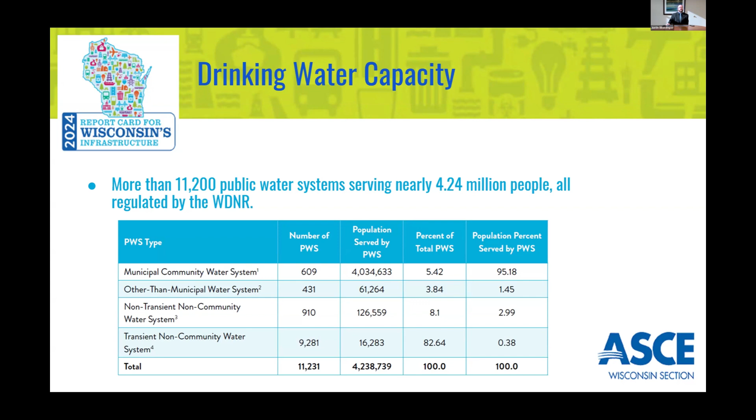56 of these systems are surface water systems, and they include some of the largest communities in the state, including Milwaukee and Green Bay. They supply almost one-third of the state's population, while groundwater systems consist of more than 99% of all the rest of the public water systems.

In general, drinking water capacity in Wisconsin is adequate, with plentiful access to groundwater aquifers and surface water supplies such as Lake Winnebago, Lake Michigan, and Lake Superior.

However, there was a study back in 2021 through the DNR showing that lake levels in the Central Sands region - i.e. groundwater levels - are being affected by collective withdrawals of high capacity wells, mainly used for agricultural irrigation purposes. So there is some concern that overpumping can lead to decreased groundwater levels.

A little bit more about capacity: there are 575 municipal water utilities that are regulated through the PSC, and they're all required to file annual reports. Based on these annual reports back in 2022, a little bit over 17% of the utility-produced water was reported as non-revenue water.

Of that 17%, it's estimated that 13% of that total is due to water leakage, whether it's background leakage - which is kind of undetectable and always there, persistent - or actual water main breaks, one of the two. This does result in potentially wasting water.

Obviously, it's wasted water, but the order of magnitude of cost, although difficult to quantify, could be in the tens of millions of dollars by the time you account for pumping costs, treatment costs, electricity costs - all of which does result in inflated water rates for consumers.

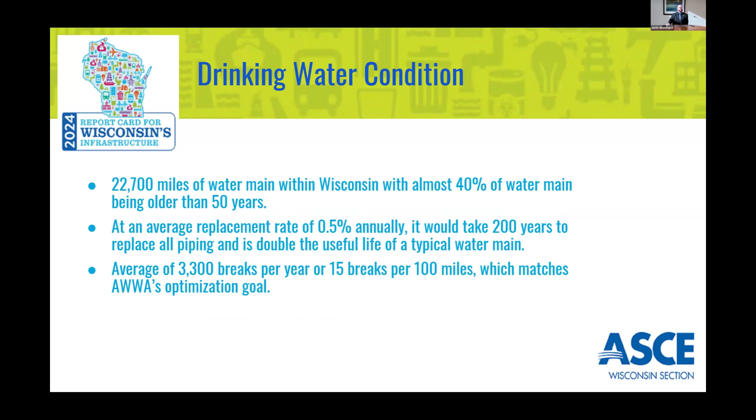Locating and repairing these breaks is expensive from both a financial and labor perspective. It can often tie up municipal laborers for the better part of a day, cause traffic and business disruption, and damage to private and public property. So it's key to keep the breaks down to a minimum. It's unneeded costs, unneeded labor. So here's more about operation and maintenance.

Wisconsin is one of the only few states where all municipal water rates, also known as tariffs, and service standards are established through a state agency, in this case the Public Service Commission of Wisconsin. So if utilities want to voluntarily raise their rates, review and approval through the PSCW is required, which is a 6 to 8 month process typically.

Because of that arrangement, most water utilities here in Wisconsin are in a relatively good position to remain financially viable. However, ongoing committed capital improvement funding for water utilities is still lacking, evidenced by that 200-year replacement cycle. With limited government resources to go around, prioritizing spending on buried infrastructure is far more complicated than just replacing the water main when you do a road replacement project anymore.

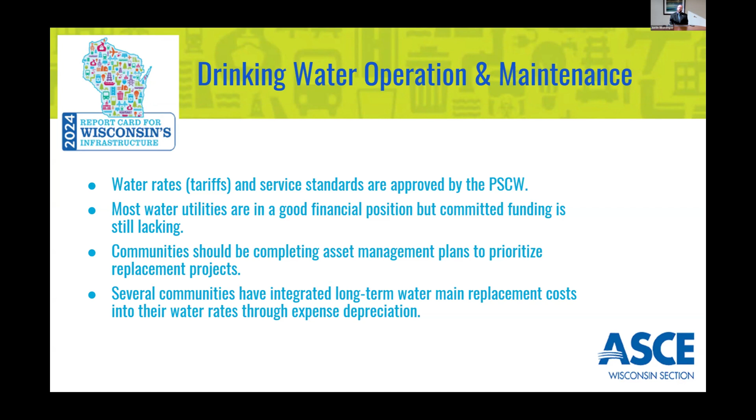So it's a recommendation that the water utility should be conducting a risk-based infrastructure assessment or an asset management plan to prioritize these projects for its capital improvements plan. They should also be evaluating the best options for incorporating the cost of ongoing long-term replacement into their rate structures. Several communities have integrated a long-term water main replacement cost into their water rates or tariffs using an expense depreciation method to basically cash fund their annual water main replacements. This allows utilities to pay for water main replacement pretty much through the year, immediately, without bonding or borrowing costs, thereby reducing the overall total cost by avoiding interest on debt.

Many utilities take advantage of the DNR's Safe Drinking Water Loan Program, or the SDWLP-WI. It combines state funds and capitalization grants from the US EPA and the Drinking Water State Revolving Fund, which is the national pot of money. They offer fixed rate, subsidized, or low interest loans and grants, which they define as principal forgiveness.

Back in 2021, the Infrastructure Investment and Jobs Act, or bipartisan infrastructure law, committed to providing more than $600 million in additional funding through the Safe Drinking Water Loan for 5 years, which is federal fiscal years 2022 through 2026. They include separate funding categories for adding to the base program, but also having separate buckets for emerging contaminants, which DNR has mainly categorized or defined as PFAS, as well as lead service line replacements.

Typically there have been more loan funds available than requested, at least in the past 10 years or more that I've been tracking this. But recently, including this year, funding requests have exceeded loan dollars, which also mirrors the demand we've seen on the Clean Water Fund program side of things. So the program's popular, and whether it's because people are trying to take advantage of this knowing only a year or two is left, or more projects are coming to fruition due to infrastructure declining and increasing in age, I guess that remains to be seen.

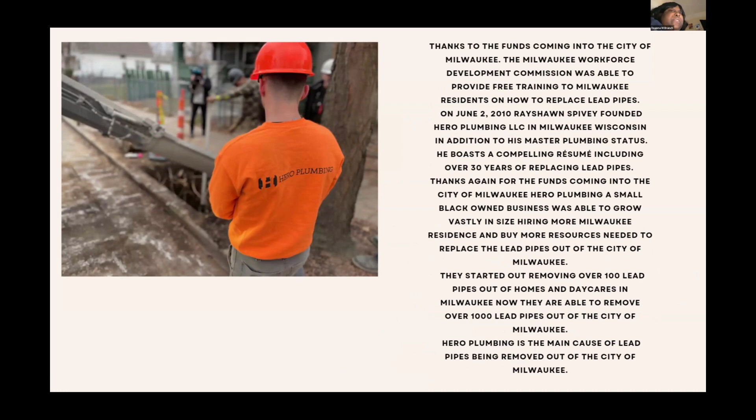Thanks to the funds coming into the city of Milwaukee, the Milwaukee Workforce Development Commission was able to provide free training to Milwaukee residents on how to replace lead pipes. On June 2nd, 2010, Rayshawn Spivey founded Hero Plumbing, LLC in Milwaukee, Wisconsin. In addition to his master plumbing status, he boasts a compelling resume, including over 30 years of replacing lead pipes.

Thanks again for the funds coming into the city of Milwaukee. Hero Plumbing, a small Black-owned business, was able to grow vastly in size, hiring more Milwaukee residents and buying more resources needed to replace the lead pipes out of the city of Milwaukee. They started out removing over 100 lead pipes out of homes and daycares in Milwaukee. Now they are removing over 1,000 lead pipes a month out of the city of Milwaukee. Hero Plumbing is the main source of the lead pipes being removed out of the city of Milwaukee.

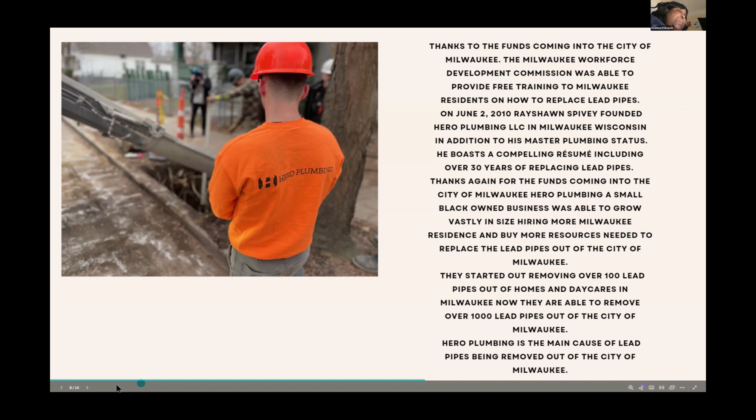The bipartisan infrastructure law provided the necessary funding to remove all the lead pipes from the United States, and that is why Rayshawn Spivey and I have been advocating to keep funding the work being done, meeting with President Biden and Vice President Harris every time they came to Milwaukee in support of the bipartisan infrastructure law, even filming political commercials in support of the funding received from the bipartisan infrastructure law and getting the chance to speak about our advocacy work at the Democratic National Convention.

Next slide, please. Deanna, your time is almost up.

This is the MICAH Health Equity Task Force I'm a part of, to restore health services in the community. The clinic that saved Aiden's life was closed down, and I have been advocating to get it reopened, and it will be reopened within the next year because of my advocacy work. Next slide, please.

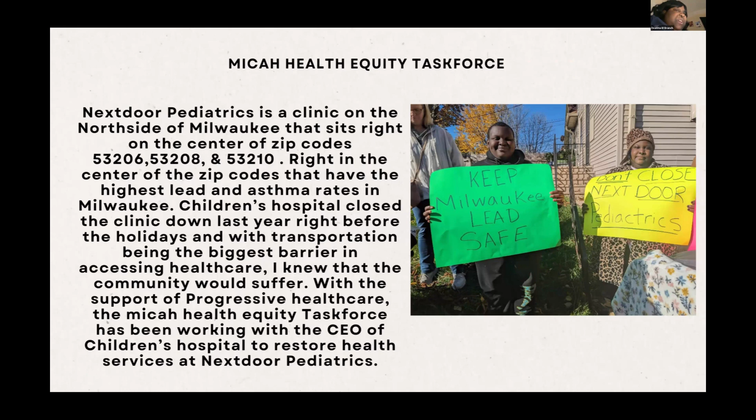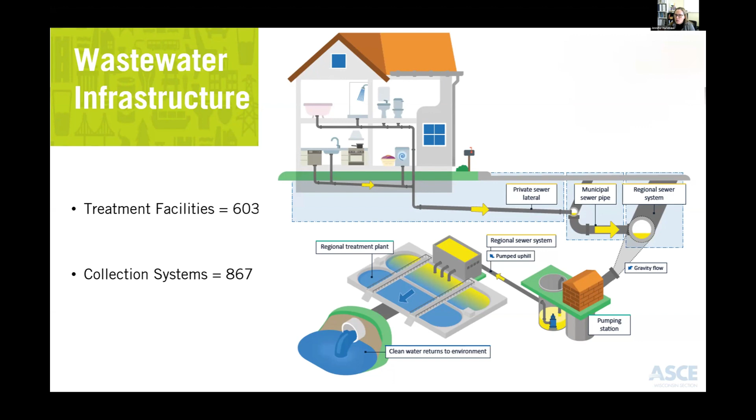So now that we have defined a little bit about wastewater infrastructure, let's dig into some of the report card categories.

For capacity and condition, at our utility, we evaluate our system for capacity and condition needs, and we plan projects. We fill out a compliance maintenance annual report, or a CMAR, each year to send to Wisconsin DNR that reports on meeting discharge requirements for treatment and if overflows occurred. However, that data is not in a centralized database system for statewide analysis reporting. The only available data provided for the ASCE report card was a spreadsheet of wastewater overflows.

More capacity in the system is needed as communities grow, but growing communities are usually not the reason for overflows. It's not difficult to find sanitary sewer collection systems that are beyond their expected design life and in need of replacement or rehabilitation. The older systems are susceptible to inflow and infiltration, such as rain and or groundwater that seeps into the system and overwhelms pipe and treatment plant capacity, causing backups, sanitary sewer overflows, and wastewater bypasses at treatment plants. However, rainfall isn't the only reason why overflows would occur or could occur. Equipment failures, power outages, broken pipes are just a few of the other reasons attributed to reported overflows.

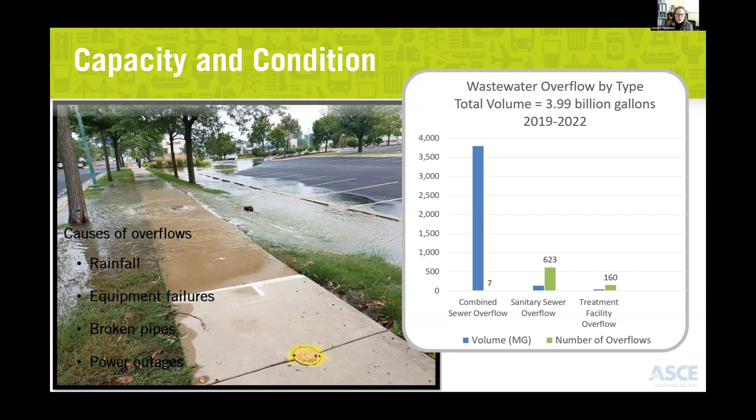Just a couple of suggestions for raising the grade as far as condition and capacity concerns: there is definitely a need for capital improvement projects to achieve these needs. Potential impacts of climate change, such as I&I, may impact collection systems such that future capacity will be more difficult to predict and costly to address. So ongoing monitoring and planning are required to maintain or achieve those systems.

Causes of overflows included rainfall, equipment failures, broken pipes, and power outages. A consideration and recommendation is to think about adding on-site power generation at lift stations to match the requirements that are on treatment plants. And Justin mentioned this several times too: it was also a recommendation for wastewater that robust asset management programs are needed for capital improvement planning.

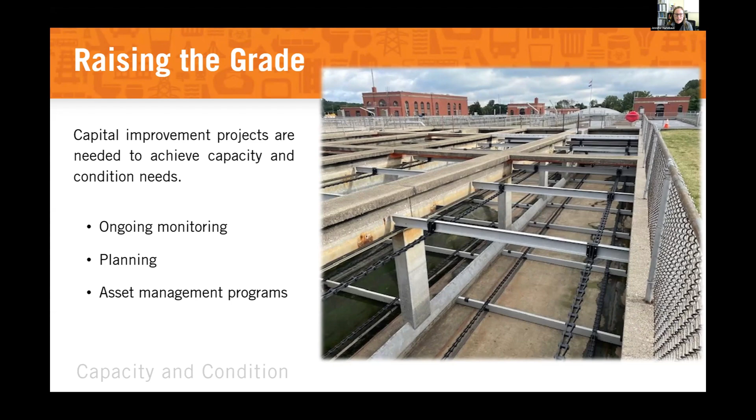Wisconsin Administrative Code NR 210 required that all owners of collection systems develop and implement a capacity management, operation, and maintenance, or CMOM, program by August 2016. As mentioned earlier, municipal wastewater treatment plant owners are required to submit a CMAR report every year to DNR. That CMAR is a self-evaluation tool that describes your management activities, some physical conditions of the system, and performance of the treatment, which can impact permit compliance.

There are some other sections, including staffing, preventative maintenance, operations certification, education, financial management of the systems. So facilities report on whether they have O&M manuals, and then rate the overall maintenance of the plant. They also report on whole effluent toxicity, or WET, failures in the CMAR.

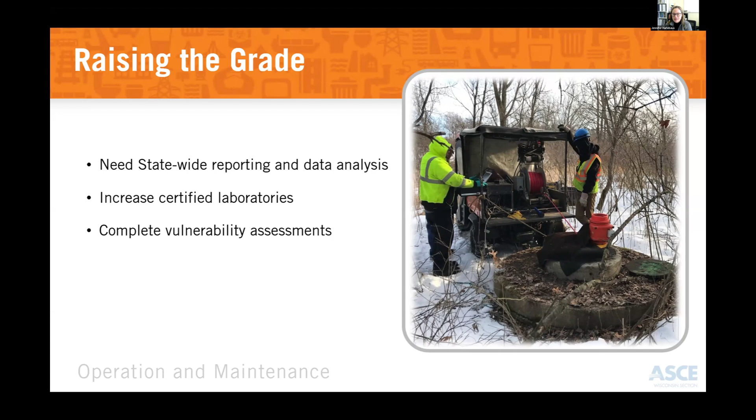For funding and future need: in 2022, the EPA Clean Watersheds Needs Survey estimated that municipal wastewater needs for Wisconsin totaled 5.5 billion over the next 20 years. The Wisconsin DNR and the Department of Administration jointly administer the State of Wisconsin Clean Water Fund program under the Environmental Improvement Fund. The program has provided over 6.9 billion in loans since it began in 1991.

In Wisconsin, the state match is provided through revenue obligation bonds. Since the beginning of the Clean Water Fund program, through the '23 state funding cycle, no application had been denied due to a lack of loan funds. However, last February, stakeholders were notified that applications for financial assistance in the '24 fiscal year significantly exceeded available funding.

The funding list for '25 was released in December, showing a continued high demand for financial assistance. Requested project funding in '25 totaled $524 million, exceeding the 400 million allocated for the program. Utilities are having to seek other funding sources, such as general obligation bonding, but this will cost ratepayers more due to a higher interest rate. It's likely projects are being delayed due to the uncertainty in funding.

This is concerning because the backlog of projects is only continuing to grow. More federal, state, and local funding is needed to help municipalities and utilities make upgrades to maintain their systems and meet existing and new regulatory requirements. Specifically, permit holders will incur significant capital and operating expenses to deal with PFAS once limits are established. Planning is necessary for the physical facilities and financial needs for achieving these anticipated limits.

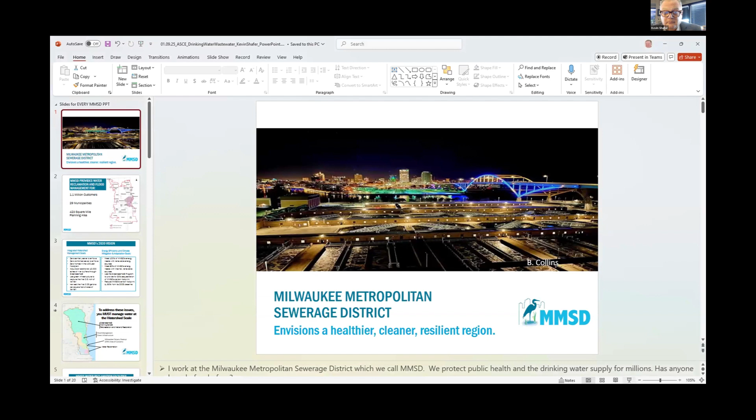I'm a civil engineer. I started at the district in 1998 as the head of the engineering department, and I've been executive director since 2002. So I've been doing this for 22, 26 years, however you want to do your math. And we're really trying to take a holistic approach to what we are trying to do, which I'll explain here.

Some of the points that were brought up earlier about funding at the state level is a huge issue, and we are going to be working this coming budget cycle trying to get additional funding from the state legislature to fund clean water and drinking water initiatives.

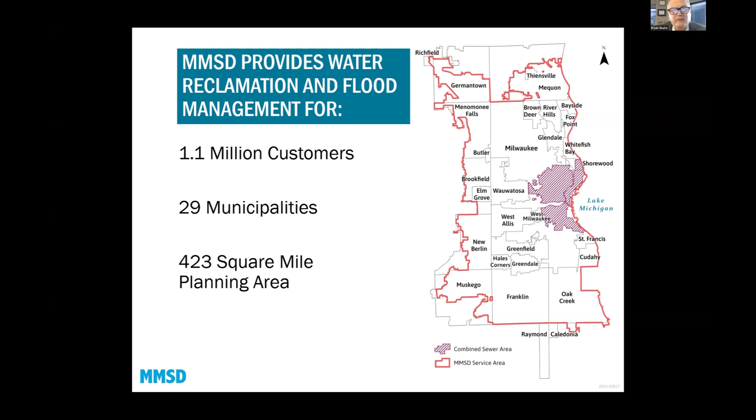Just a quick slide on what Milwaukee Metropolitan Sewerage District is and does. We are a wastewater treatment facility, not drinking water, just wastewater. We have 2 water reclamation facilities, and we also provide flood management. On the previous presentation, you heard about combined sewers and separate sewers. This hatched area on this map is a combined sewer area, and the rest of the area is a separate sewer system. So we're a regional utility that receives flow from 29 different municipalities, as you see on this slide. We have to take the flow that comes to us and then try to treat that and discharge it back to the environment in a clean fashion.

In 2009, after going through many years of battles on this, I decided to write a vision for the year 2035, where I set a goal for zero combined and sanitary sewer overflows, zero homes in the 100-year floodplain, trying to restore some of the green features of this very urban network to try to have nature help us manage water better. That's the left side of my brain.

For us to take this approach to look at bringing nature back into the equation and to try to manage and reduce overflows, we've taken what I like to call the watershed scale approach. We're looking at the entire Milwaukee River watershed, because water flows downhill—it's a very basic understanding. So how do we manage that water so it does not overload the system as it flows downhill? As I said, we have 2 water reclamation facilities, which I'll talk about in a minute. We have a flood management authority, which I'll show.

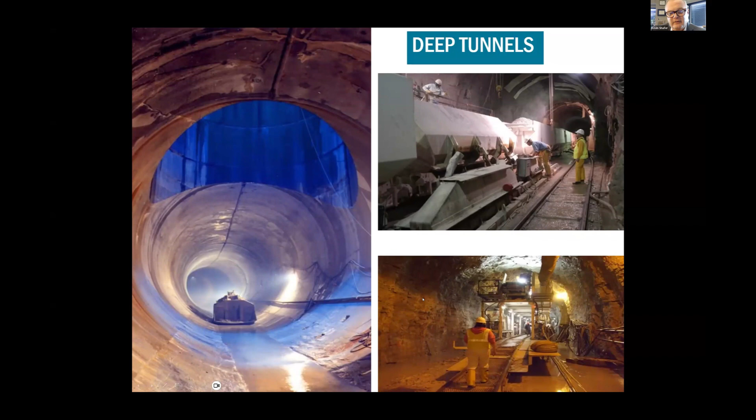Since the deep tunnel came online in 1994, we've captured and cleaned 98.6% of all the water that's come to us. So that CSO number you saw earlier, for us, would be that 1.4%. We're required by the federal government to be greater than 85%, and as you can see, we're much higher than that. So the federal and state government, in a lot of cases, is using Milwaukee as an example for how to manage combined sewer and separate sewer overflows throughout the country.

We also do flood management, and we don't do it like a lot of places. When I started at the district in 1998, almost all of the rivers in the area were concrete lined, and that has its own issues, but it really cuts off the water from nature. So we have a massive flood management program where we are removing concrete lining. We're providing 100-year protection against flooding in the waterways.

I mentioned green infrastructure. We started this in 2002, the year I started as executive director. We have over 150 million gallons of storage from green infrastructure, rain barrels, rain gardens, green roofs, bioswales, porous pavement installed throughout the area. When rainfall hits it, it holds that water, or allows that water to infiltrate into the groundwater. This is a great way to mimic nature to manage those flows downstream better. It's also a great workforce development effort and a great way to get the public involved with what we do.

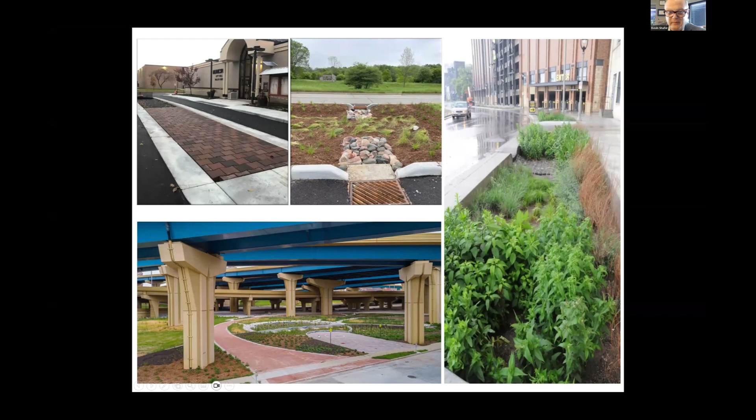Greenseams I mentioned before, this is a program where we're purchasing easements on property to absorb land. We're not allowing any impervious cover, so no concrete, no asphalt is allowed on these surfaces. We've got about 3.1 billion gallons of ability to store water in this land, and it's around 5,500 acres preserved.

We're also working with farmers, mostly in the upper Milwaukee River watershed, trying to address the runoff from farmland, which sometimes has heavy phosphorus, nitrogen, and sediment loads. We've got about 1,700 acres preserved, around 840 million gallons stored. It's in partnership with the federal government, and just this last October, we received a $19.8 million grant from USDA to continue this program. So again, we're being looked at as one of the leaders in the country for how to manage water on a watershed scale.

We also started a wetland restoration and reforestation program. We are just implementing this in the last couple of years. We are planning to plant 6 million trees in the greater Milwaukee watershed, whether it's rural, urban, or suburban. And we want to restore 4,000 acres of wetlands because those are really the watershed's lungs, the way to store and treat water naturally.

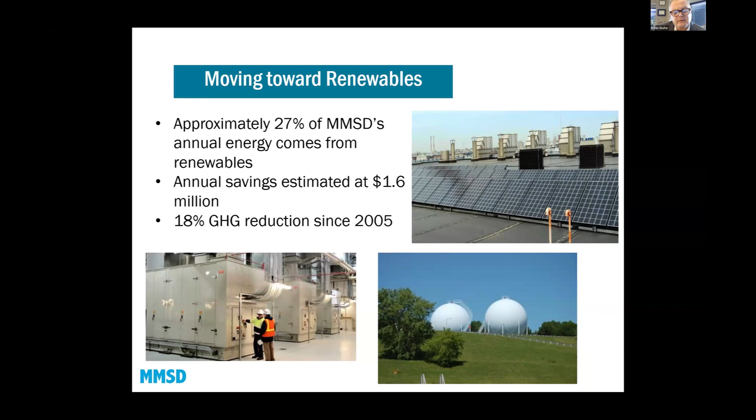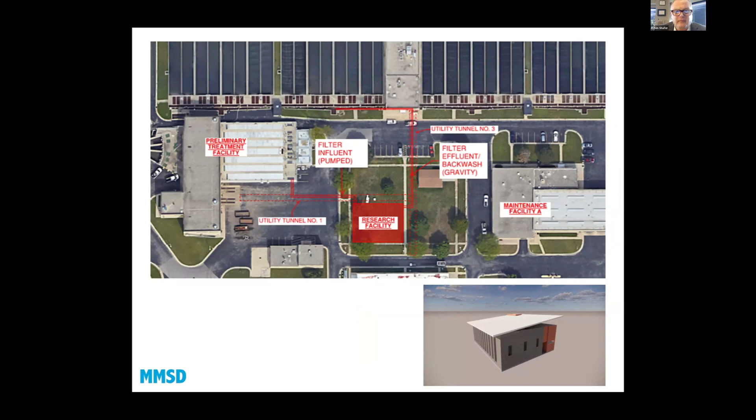So we are slowly, but step by step, working towards that 100% goal of renewable energy. We've also found that we need to really support this with a strong research program. So earlier in 2024, we announced that we're going to build a research facility at our South Shore plant that will have direct connections to the water systems at the plant.

So we can do live, real-time testing of wastewater as we move forward. And with that, none of this can be done on our own. We really need partners to help. We're out there collaborating, doing social media, really trying to bring everyone into the discussion about cleaner water. And thank you for having me.